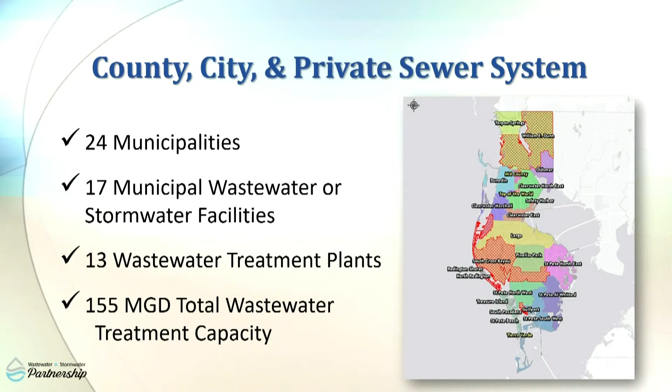Of the 24 municipalities within Pinellas County, 17 own or operate wastewater and or stormwater systems. This partnership allows members to collaborate regularly on solutions to reduce sanitary sewer overflows countywide. Together, we have a total of 13 wastewater treatment facilities and a combined treatment capacity of 155 million gallons per day. Nearly 1 million residents and businesses rely on these systems every day, in addition to the millions of vacation visitors every year.

Wastewater and stormwater infrastructure are a foundation on which our county thrives. These systems allow us to live in harmony with our natural environment by protecting our waterways, Tampa Bay, and the beaches. By doing so, we promote a robust economy and a beautiful destination enjoyed by our community and by millions of visitors every year. The work we do is truly a shared priority for all of us in Pinellas County. All members of the partnership have a vital role to play as environmental stewards, and we take great pride in fulfilling this role.

Collaboration is the foundation of our partnership. Working group members share resources and knowledge in support of a 7-point strategic action plan aimed to further the program's goals: performing inflow and infiltration studies, eliminating hydraulic bottlenecks, rehabilitation and replacement of infrastructure, stormwater drainage improvements, enhancing public dialogue, tracking, proposing, and implementing legislation or rules that impact these initiatives, and improving resource sharing and maximization, which is the foundation upon which our partnership can share resources across municipal boundaries for the benefit of all Pinellas County residents.

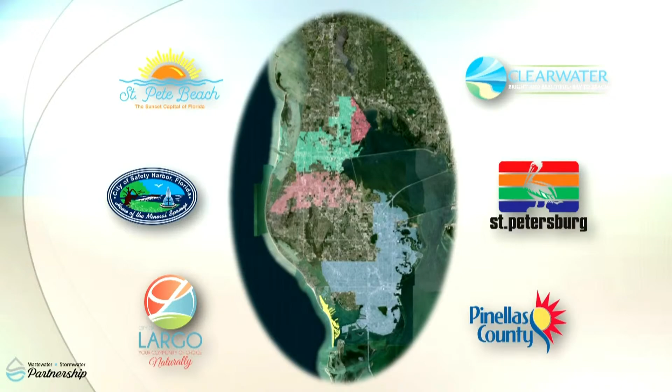Working group members from Pinellas County and the cities of St. Pete Beach, Safety Harbor, Largo, Clearwater, and St. Petersburg are here to update you on the work they're doing to keep our infrastructure strong and our water safe throughout Pinellas County. So at this time, I'd like to introduce our first presenter this morning, Mike Clark, Public Works Director for the City of St. Pete Beach.

I'm Mike Clark, and I have the privilege of being the Public Works Director for St. Pete Beach, which is currently the #1 beach in the nation, as rated by TripAdvisor.com. Yes, that was a shameless plug. Please come visit.

Are we speaking at the podium? Okay, I'm moving now. And we're controlling? Okay.

COVID-19, what more surprises can come? Let's see. All right, so...

This certainly contributed to the number of SSOs that we were experiencing during fairly mundane storm events. It was surprising how little it took for St. Pete Beach to be overwhelmed in the sanitary sewer system. As we come out of our pump station number 2, there was a significant hydraulic bottleneck that was the location of the vast majority of our SSOs.

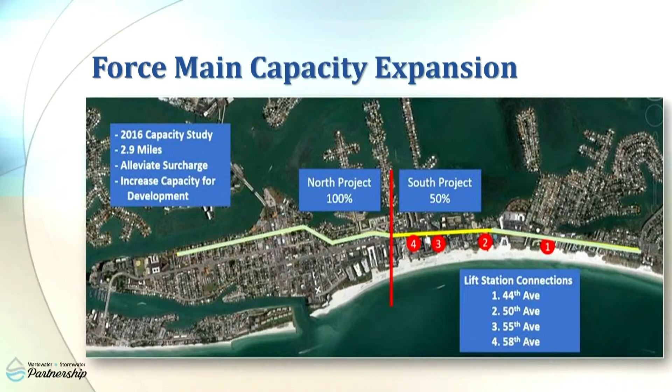And we expect that this project will finish up before the end of this year, and then we'll be off Gulf Boulevard to be restored and back to normal again. So it's been a great project, very disruptive, but patience is the key word, and we will get there soon.

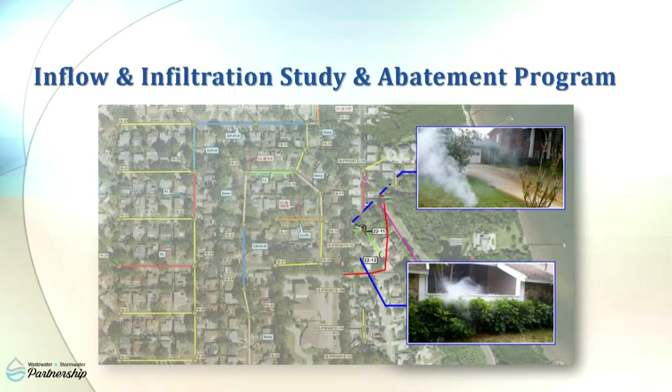So the City of Safety Harbor issued a request for qualifications for inflow and groundwater infiltration abatement program in April of 2018. That seems like a long while ago, but it does take some time. Following a selection and review process, McKim & Creed was awarded the study and the project. Notice to proceed was issued July 2018.

Field monitoring was completed in April of 2019, and the results of the monitoring analysis qualified certain areas of the city for inclusion in source investigations. Source investigations included smoke testing, dye testing, manhole inspections, night flow isolations, and CCTV inspections. Work was completed by October of 2019, and McKim & Creed issued their final report with recommendations in February of 2020.

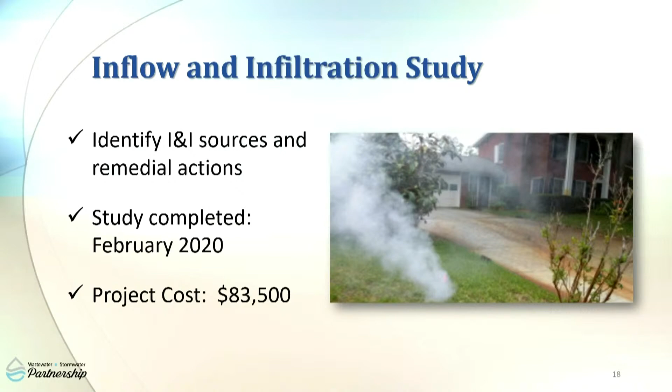So the city issued a purchase order in September of 2020 to begin the abatement process of the gravity sewer mains utilizing pipelining. We also included areas of deteriorated stormwater piping in the lining contract. The contractor began work in February of 2021. The current cycle of work will line over 25,000 lineal feet of pipe, complete 80 lateral liners, and over 1,700 lineal feet of pipe replacement.

We look forward to comparing our monthly flow totals once this work is complete in order to see the true impact of the lining program.

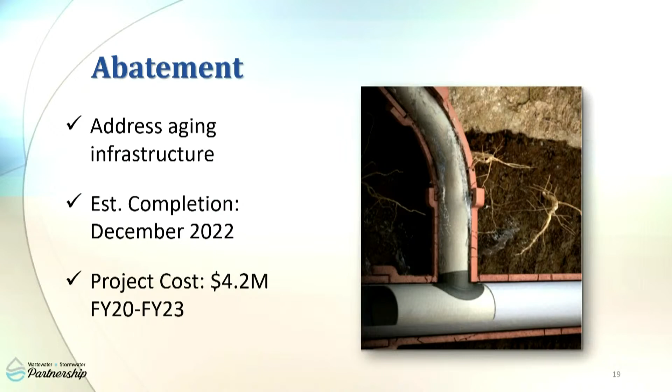So what's next? The city's current focus is completion of lining in Priority 1 areas prior to moving on to 2 and 3 areas. We expect to be into Priority 3 areas in fiscal year 23, so this is a long-term program. Then we'll be able to analyze the post-lining flow data.

Not only do we have a contractor, but city staff addressing these issues as well. City staff spent time delivering notices door to door to homeowners regarding issues found during smoke testing and dye testing. The majority of issues found were missing cleanout caps, small cracks or roots in the homeowner's laterals, or separations and joints of the homeowner's sewer lines. We were able to find and address a few wastewater stormwater cross connections as well.

City staff also installed manhole inserts in manholes in low-lying areas or within roadways or yards that experience localized flooding. These inserts mitigate inflow of stormwater during high rain events. City staff also installed locking cleanout caps on cleanouts within the right-of-way, since homeowners like to remove those cleanouts during flooding events to alleviate yard flooding. During smoke testing, it was discovered that many inflow issues were related to these missing cleanout caps.

We are hopeful that all of these strategies will mitigate any future spills, improve the integrity of our stormwater system, and allow for increased capacity and decreased inflow and infiltration.

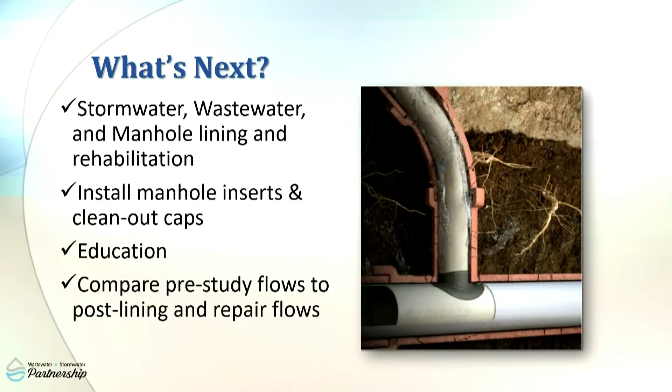Our next presenter is Shelby Beauchemin, Assistant Director of Environmental Services for the City of Largo.

Thank you, Renee, and good morning, everyone. I'm Shelby Beauchemin, Assistant Director of Environmental Services, our wastewater department in Largo. Today I'll be discussing a sanitary sewer system hydraulic bottleneck repair, and we'll also give a preview of our next project.

The hydraulic bottleneck repair supports 3 of the elements of the Wastewater Stormwater Partnership Action Plan. The city has an aggressive inflow and infiltration study and abatement program that works on a continuous cycle. We also tackle hydraulic bottlenecks as they present themselves during storm events and I&I studies, and we use this information to complete repair and rehabilitation of the system.

The city is shown in pink on the map. Our wastewater collection and treatment system serves over 100,000 people in the city of Largo and also small portions of St. Petersburg, Clearwater, and Pinellas Park.

Today we've chosen to highlight Lift Station 20 Wilcox Road improvements. With assistance from McKim & Creed, we completed an I&I evaluation and identified hydraulically limited pipes that were causing SSOs, or sanitary sewer overflows.

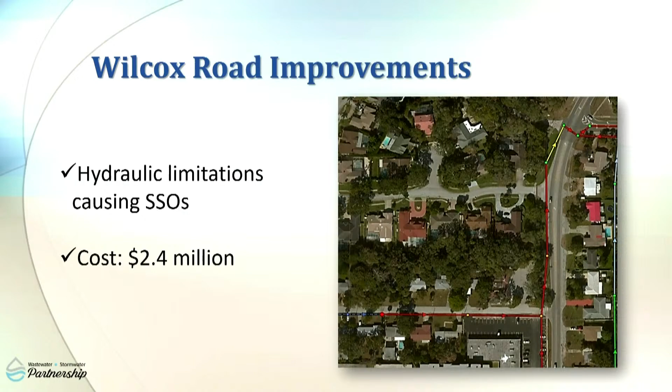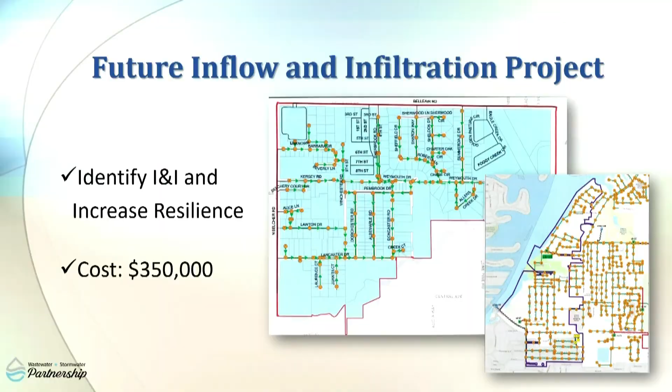In addition to I&I, we're targeting these two basins for resilience and relocating both lift stations out of the floodplain. I look forward to updating you on our progress next year. And on behalf of Environmental Services and Engineering for the City of Largo, I'd like to thank our mayor, commission, city administration, and the ratepayers for the continued support of our infrastructure improvements.

Our next presenter is Rich Gardner, Public Utilities Director for the City of Clearwater.

Thanks, Shelby. Good morning, everybody. Today I'm going to talk about our Smart Cover pilot program.

The Smart Cover system helps us reduce bottlenecks by alerting us to blockages building up in our sewer system.

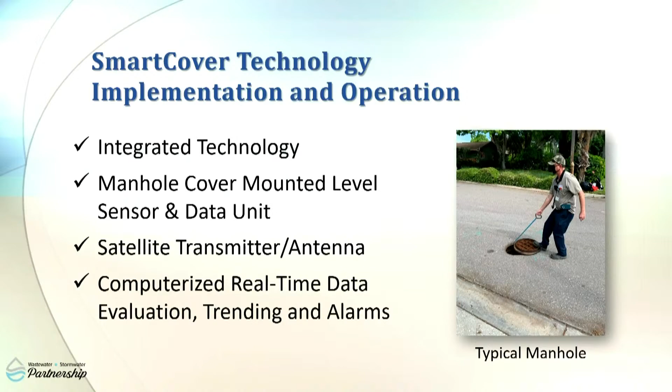The installation of each Smart Cover takes approximately 1 to 2 hours. The work consists of preparing the underside of the manhole to mount the sensor, data receiver, transmitter, and satellite antenna, positioning the equipment correctly to obtain accurate level data, resetting the cover, and then sending the GPS location data to the Smart Cover data center. The system is then operational.

Computer, internet browser, or smartphone apps are used to access the data remotely. The Smart Covers allow the operator to monitor critical manhole water levels in real time. Sanitary sewer overflows can be anticipated, then staff may clean the sewer proactively.

Data trending can be utilized to identify areas of the sewer system that need additional investigation. Sewer system maintenance schedules can be fine-tuned based on the trend data. Real-time operating and trend data will be utilized to complete regulatory reports as well.

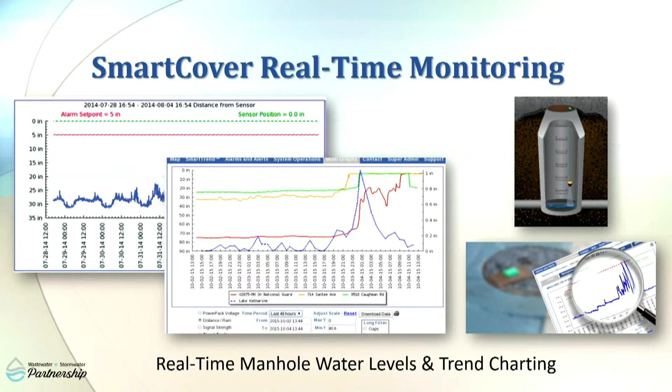The smart covers enable sewer system operators and engineers to proactively prevent sanitary sewer overflows and conduct operational maintenance and upgrade planning more efficiently. The smart covers provide the data necessary to accurately prepare regulatory reports.

Smart covers allow sewer system operators and engineers to proactively prevent sanitary sewer overflows and conduct operational maintenance and upgrade planning more efficiently. The covers provide data necessary to accurately prepare regulatory reports as well. In fact, since we've installed the smart covers in April, we've had 9 alarms that allowed us to clear blockages before they created sanitary sewer overflows or sewer backups into customers' homes.

Now, what does that lead us to? We have multiple projects going on at all times. Some of them are in the collection system, some of them are at the plants, lift stations, and the first couple that I'm going to talk about are specific projects.

The first one is a brand new wastewater lift station and force main that is being designed and constructed to address hydraulic deficiency within our system during heavy rain events. This will allow us to move 3.5 million gallons of wastewater from the southwest basin, one of our wastewater treatment plant basins, to the northwest basin.

We also have the capability through the same force main, but using an existing lift station, of transferring flow the opposite direction. This will allow us to shift the flow between the different plants depending on the flows going into the facility, improving our ability to treat the wastewater that's coming in and reducing the potential for overflows, which is a key part of this.

This is an area that did have overflows during that storm. It is a design-build project, and it was awarded to Archer Western in March of 2021, and we anticipate construction being completed by June of 2022, in time for next year's rainy season.

So we're looking forward to having that available to us.

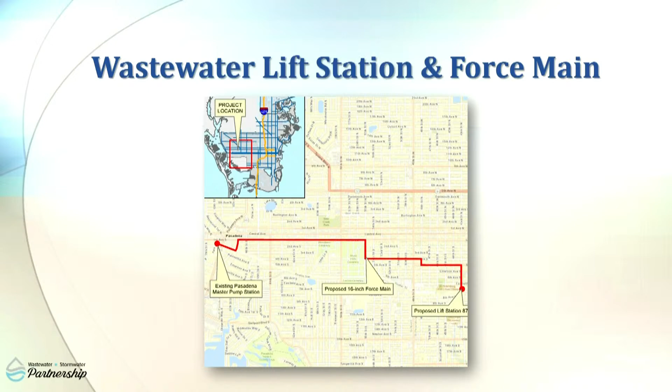The next project also relates to the prior one, and this is the Pasadena Force Main, a rehabilitation and replacement project. This force main takes flow from our master lift station, where the new wastewater force main will be coming into. We also receive flow from some of our neighboring communities in this location, and it sends it to our Northwest facility. The project is about to go out to bid. We anticipate construction starting by the first quarter of fiscal year 22 and an anticipated cost of $7 million.

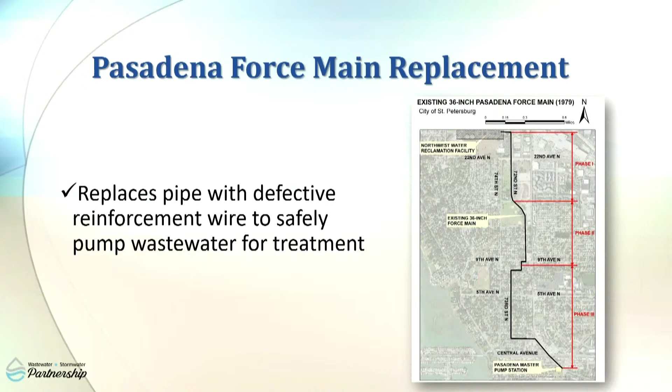The following item gets into some higher level programmatic projects. They're not specific projects at this point. We have a lot of pipe, whether it's the gravity sewer main, force mains, water mains, or reclaimed water mains. There's a lot of pipe in the ground out there, and it ages. Over time the efficiency goes down, and you start having problems with the materials degrading or with the conditions of the soils impacting the pipe. We need to come up with a system that allows us to proactively assess the condition of the pipe before there's a failure, before we have problems that impact our residents and the environment as a whole.

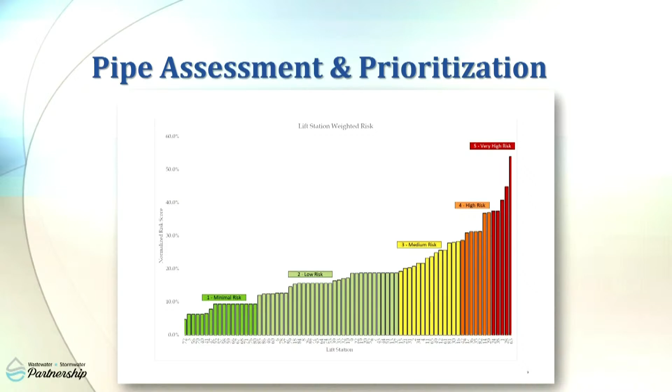We're doing the same when it comes to our gravity system, our water system, and our reclaim system, because all of our infrastructure is old. We have a lot of old systems out there, and we need to keep them operational for the next 50 years for the residents who are going to be following us in this beautiful location.

Another one—so we have the pipes. When it comes to the wastewater side, from the pipes it usually goes to the lift station where it's pumped to the wastewater treatment plants. This year, we're going to have 5 different lift stations going out to bid for construction. Design has been completed, and we're looking at about $10 million in work. All of these projects address rehabilitation and repair. They're also looking at capacity. Every time we do a major upgrade on a lift station, we look at our future capacity needs and address those as much as possible.

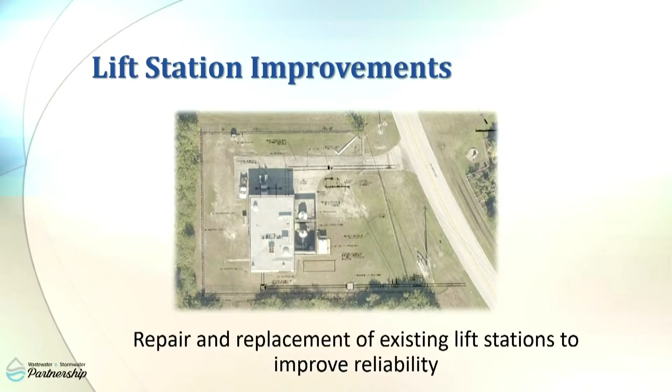We're also looking at resiliency and sea level rise. If a station is located near the coast, where are the electrical panels? Do those need to be raised? What other improvements need to be made in order to handle those future conditions? We've just completed an overall prioritization of all the lift stations throughout our city so we can make sure we address the most critical locations first. From that, we'll be developing specific projects for the lift stations that need additional attention in the years to come.

The last one is our water reclamation facility—that's where the wastewater ends up. We had a lot of work done at our Southwest facility following the storms, which increased our capacity there so we can handle upwards of 75 million gallons per day hydraulically in a peak event. That's what allows us to handle 157 million gallons per day on a hydraulic event, system-wide, spread out across our 3 different plants.

Right now, we have major projects going on at 2 of the plants, the Northwest facility and the Northeast. The Northwest is having a new influent pump station installed with a new headworks, as well as odor control and 2 additional reject storage tanks. In the event the treatment plant isn't meeting reclaimed water standards, the water is diverted to the reject tank for future treatment when flows subside and we're able to get it through the plant safely.

At the Northeast facility, we're having electrical upgrades done. The systems there are from the 50s and 60s—we have switchgear and equipment you can't find parts for anymore, so we're having to construct those as needed. We're doing a full upgrade on all of the electrical.

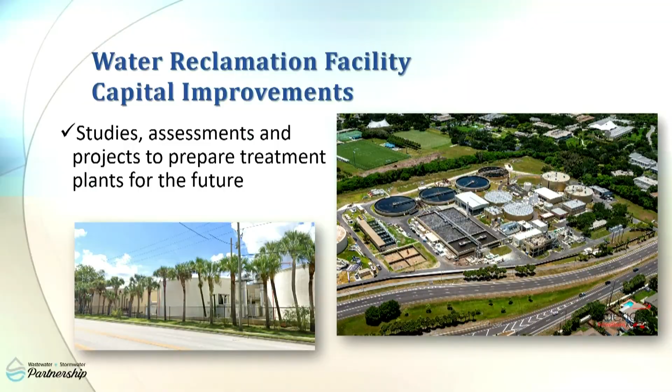At the same time that we're doing that, we are looking at the resiliency of it as well. What is the impact going to be with our future needs, looking forward, not just backwards? And those projects alone are going to be upwards of $70 million between the two plants.

We are right now in the process of doing RFQs, requests for qualifications for consulting firms to assist us with two separate projects. One of them is the operation and maintenance buildings for all three of our facilities. At this point, two of our facilities are located right next to the coast, impacted by surge if there were a major storm, potential for flooding, and the operations building sits right at ground level. And yet we ask our operational staff to stay there during storm events. So we need to harden the locations. We need to improve the safety for our staff so that they can feel comfortable staying at the facility in the case of a heavy storm, a major tropical storm, or, God forbid, a Cat 5 hurricane, because we need them to operate those facilities. The water doesn't stop coming in, and if anything, the flows increase in those events.

And then the other one is the Northeast Water Reclamation Facility Plan. We just completed our Integrated Water Resources Master Plan, provided an overview for all of our systems citywide, and we need to now establish the plan forward for each of the locations, and that's the intent behind this facility plan, is to take the recommendations from the master plan and get down into the details. How exactly are we going to do it? What size do the basins need to be, the pumps, and so on.

Pinellas County stormwater infrastructure includes over 800 miles of pipe, 300 miles of open conveyance, and 500 permitted facilities.

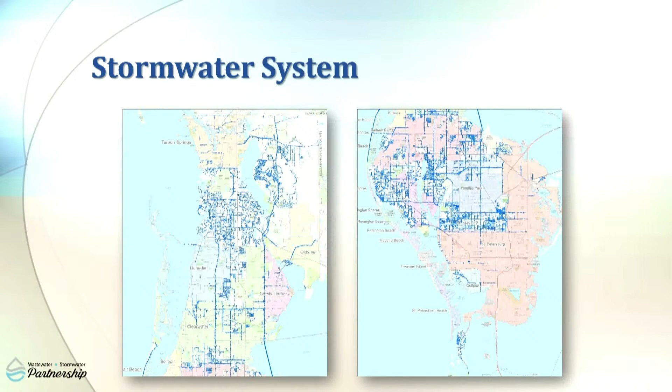Pinellas County is currently performing a vulnerability analysis to better understand the impacts of sea level rise for the next century. Even today, some areas of the county regularly experience flooding under most extreme high tide events. This is expected to get worse and more widespread as sea levels rise. The study focuses on tide events, storm surge, and rainfall. It looks at several scenarios of different intensities for present day, 2040, 2070, and 2100. The study looks at the vulnerability of assets, including transportation, stormwater, wastewater, water, natural gas, and electricity. The study will help the county plan for future conditions as it can mitigate for those adverse impacts. The goal is to identify assets at the greatest risk based on costs to repair and consequences of lost service to communities, and develop a mitigation strategy.

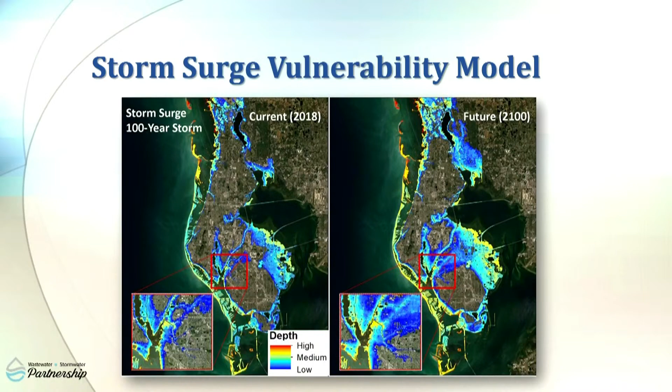This map is one example from the study that shows current and future flooding under a medium intensity flooding scenario. Most scenarios have been developed for the vulnerability study. The next steps include assessing the cost of damage, prioritizing assets by cost and impact, and developing mitigation strategies.

Pinellas County also performs ongoing updates to our watershed management plans, which analyze each drainage basin and provides options to mitigate the impacts. The vulnerability study and watershed management plans create a comprehensive understanding of long-term flood risk and provide a foundation for better decision-making.

These decisions are used to create projects and construct improvements. Many of these projects can reduce the volume of stormwater that enters the wastewater systems. Options may include installing check valves to stop the backflow of seawater onto the road, or elevating seawalls, elevating structures, or reseeding.

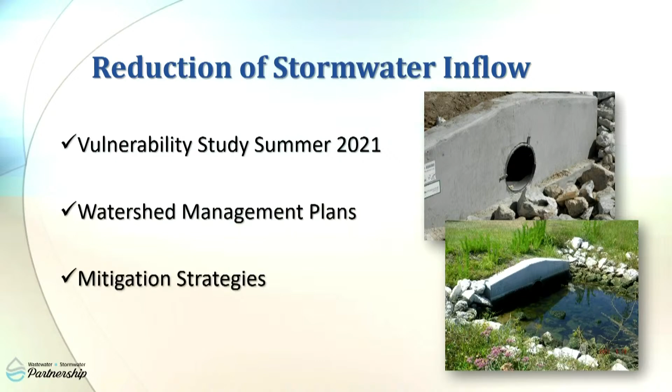Pinellas County recently purchased 40 acres of open space for the purpose of improving water quality. Important elements of the plan include dry ponds and wet ponds while preserving as many healthy native trees as possible. The project plans to include passive recreation opportunities and enhance native habitat. Initial cleanup began in February 2020. County staff partnered with the contractor, and we cleaned the Bay Point stormwater and conservation area, which included mowing, vegetation removal, and erosion repair. The project is currently under design, and construction is anticipated for 2024.

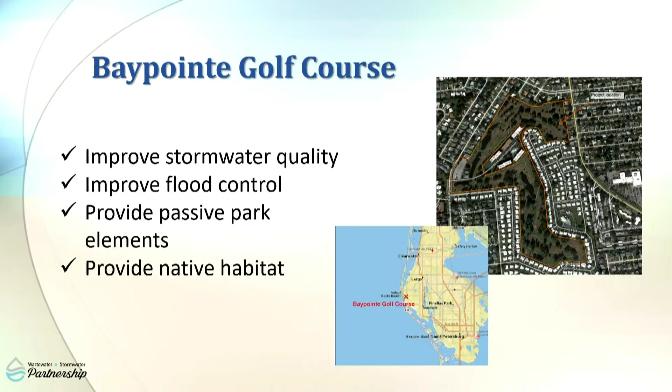Our final presenter is Pinellas County Utilities Director, Megan Ross.

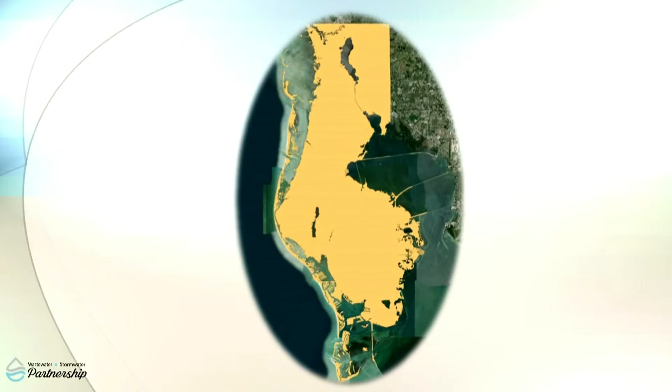This program touches on many of our action plan items, including inflow and infiltration studies, eliminating hydraulic bottlenecks, system rehabilitation and replacement, enhancing public dialogue, proposing and implementing legislation, and improving resource sharing and maximization. This project will impact customers throughout Pinellas County, both in unincorporated areas and the cities that we provide services to.

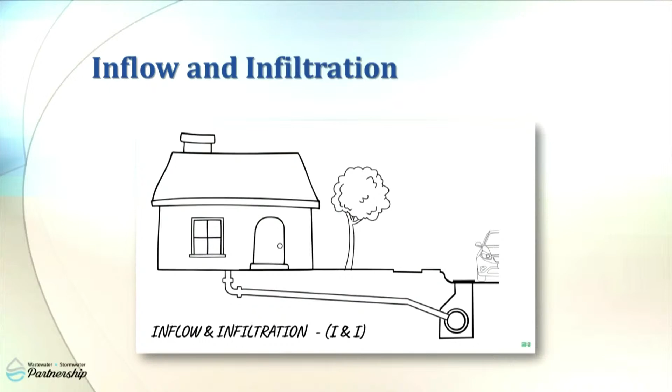A significant portion of the program will include public outreach to drive focus towards the importance of our community's infrastructure and the economic vitality of Pinellas County. The importance of wastewater infrastructure is not only a public health matter, but also an environmental one, particularly water quality, through protecting our ecosystems and natural environment. I would like to share with you a brief animated video we developed as part of the public outreach strategy for this project. It demonstrates how damaged private laterals can lead to increased inflow and infiltration, which contributes to sanitary sewer overflows in the system. Now let's play the video.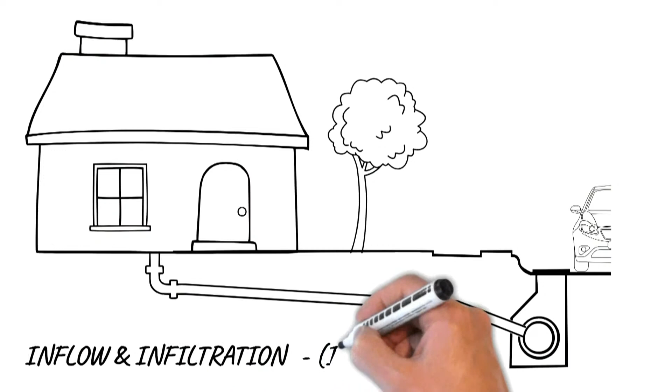A common threat to everyone's water quality is inflow and infiltration, also known as I&I. Let's start with how sewer systems actually function. Each homeowner resides on the private side of any public sewer system utility. When you flush your toilet, take a shower, or wash your dishes, you create wastewater which flows from your home into a pipe called a private lateral. This private lateral connects to the public sewer system at the edge of your property and is maintained by your city or county. Wastewater flows from the public sewer system to a treatment facility designed to handle a specific volume where pollutants and bacteria are removed.

When rainwater falls, it's known as stormwater. Stormwater percolates into the soil, increasing groundwater level as well as storm drain levels in the street. This stormwater eventually flows into creeks, lakes, Tampa Bay, and even the Gulf of Mexico, just as it's designed to do. Stormwater and wastewater flow into separate systems and should never be mixed together.

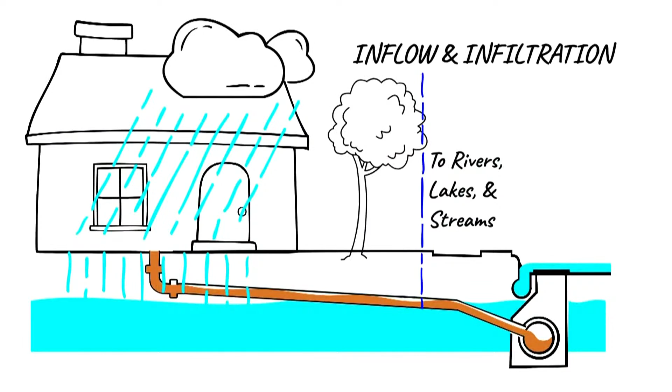So, what about I&I? I&I happens when a private lateral breaks or is damaged by tree roots or old age, which allows the groundwater table to then flow into the pipe, also known as infiltration. High levels of I&I in the public and private wastewater collection system often lead to sanitary sewer overflows, or SSOs, which again threaten our overall water quality. It's alarming to learn that up to 70% of stormwater entering the sewer system is due to damaged laterals. Though your indoor plumbing may be working fine, your aging lateral underground can be a different story.

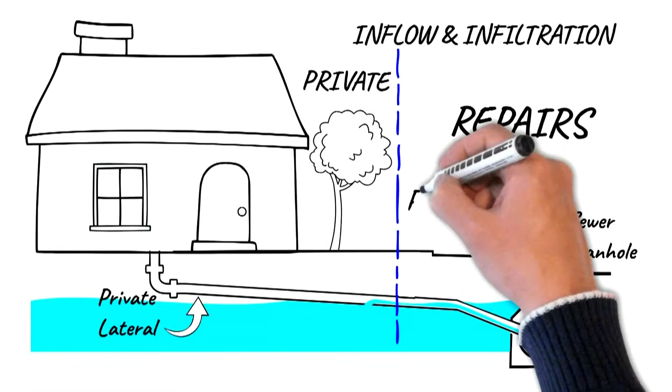In areas with high groundwater tables, sealing the public system portion may not be enough. Thus, most private lateral portions need to also be repaired to reduce infiltration into the system. With wastewater being harmful to human health and the environment, homeowners should have their private lateral inspected, repaired, or replaced by a licensed plumber to keep it functioning properly. Keeping your sewer pipes healthy will keep Tampa Bay healthy too. For more information, visit the Pinellas County Utilities website.

So as you can see, we're looking at really focusing on public outreach as we move forward with some of the policy development and other items we'll talk about in a minute.

Step 2 will be to address capacity limitations identified in previous studies within the collection system and the South Cross Bayou Water Reclamation Facility. Projects currently ongoing, like the Headworks project underway at South Cross Bayou, will expand capacity to handle higher peak flows coming into the plant, as well as eliminating hydraulic bottlenecks at the facility.